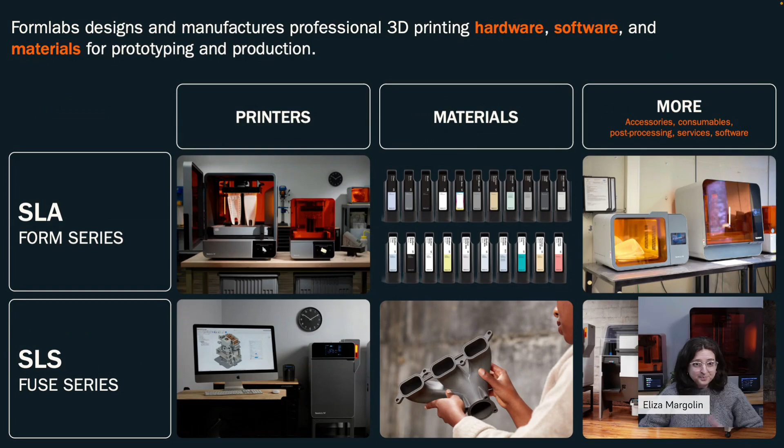Of this wide array, today we're focusing on SLA materials, so one quadrant, if you will, of Formlabs' overall business. Here's an overview at a glance of the SLA materials available. We split them into different families: the general purpose family, engineering family, dental and medical materials, materials for casting, investment casting of metal parts, and then Form X, which is more advanced workflows, and we'll look at some of those in a moment.

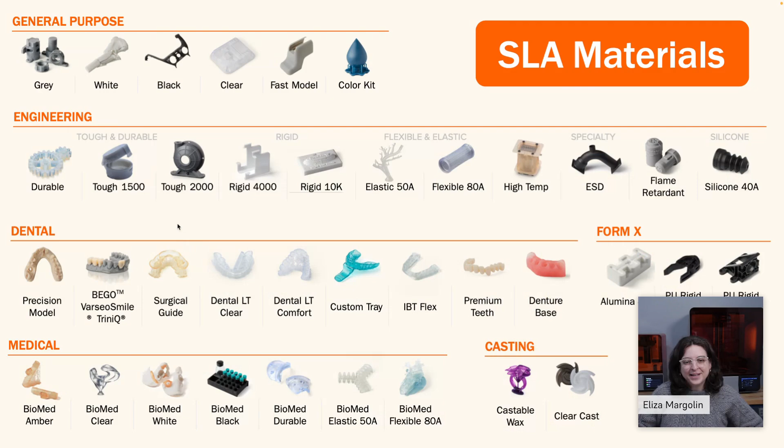The general purpose materials I mentioned are, I think, a lot of the time compared to PLA for those who are using FDM 3D printing, because it's the most accessible, most straightforward workflow. But the mechanical properties of the materials pictured here, the general purpose materials from Formlabs, are more comparable at this point to an entry-level engineering plastic like PETG.

So they are not general purpose as in insufficient for engineering purposes. They are general purpose as in they're versatile — they balance stiffness, toughness, strength, impact resistance, all of these different qualities — whereas some of the engineering materials are formulated to optimize for one or a few of these characteristics. So these are your general purpose daily drivers, if you will.

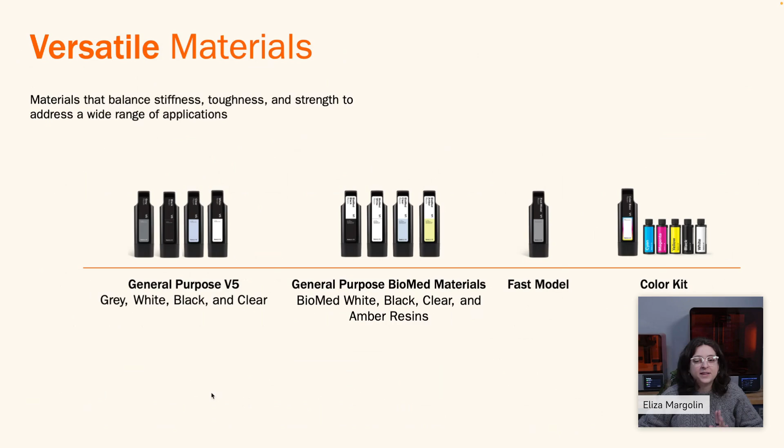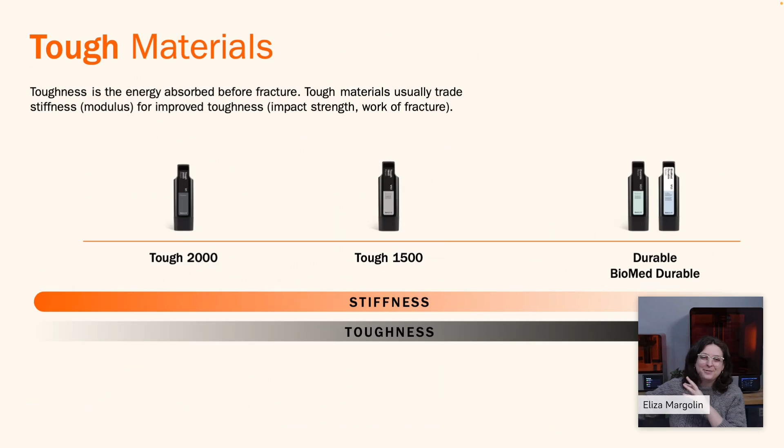Tough materials get requested a lot. Toughness is the amount of energy a part can absorb before it fractures, which is often a trade-off with stiffness. So we see higher stiffness on the left here with Tough 2000, where 2000 is the tensile modulus of the material in megapascals. On the other side, still within the tough family, we have higher toughness and lower stiffness, more ductility, on the right.

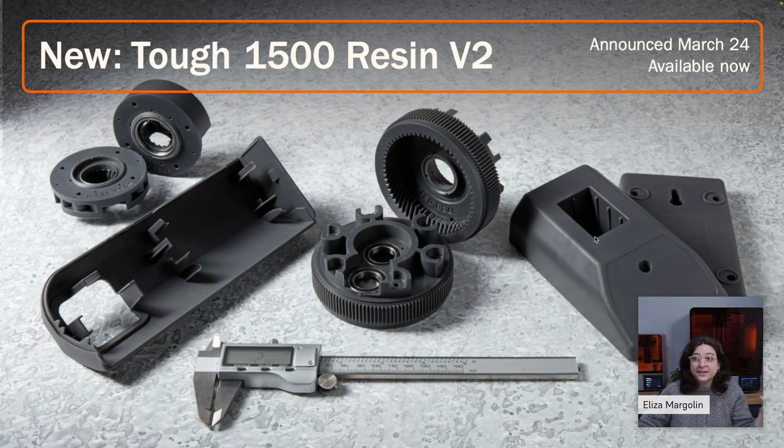If you'll indulge me, I can share a little bit about the latest material from Formlabs, Tough 1500 resin, which I have one of the parts pictured with me here. It is real — this was announced a couple weeks ago, and it's available now for pre-order. If you want to get your hands on one of the samples, we have this belt buckle, and you can request one for free on the website. We'll mail it to you, so you can get a physical sense of the properties I'll talk about for a quick second here.

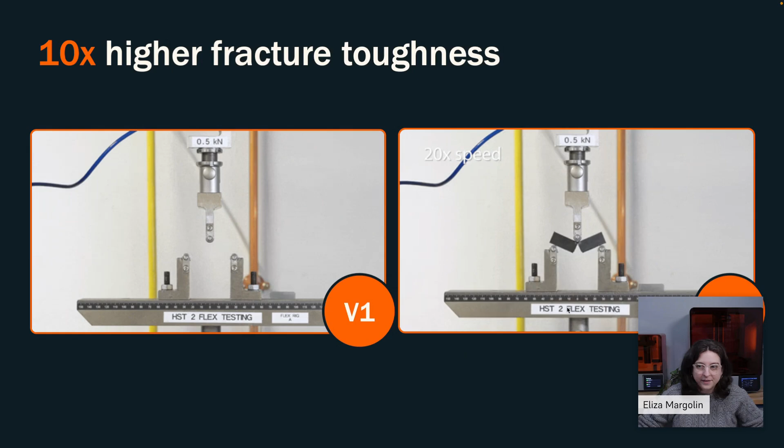If you've used Tough 1500 resin from Formlabs before, this is a different beast. Tough 1500 resin had pretty high notched izod as one of the tests, but pretty lower fracture toughness compared to this new material. So it takes 10 times more force applied to fracture the part. You can see the crack propagates much more slowly, with much more force applied.

With Tough 1500 version 1, it could absorb a decent amount of strength when the parts were thick, but thin parts were more brittle. The new formulation performs much better on toughness at thin geometries.

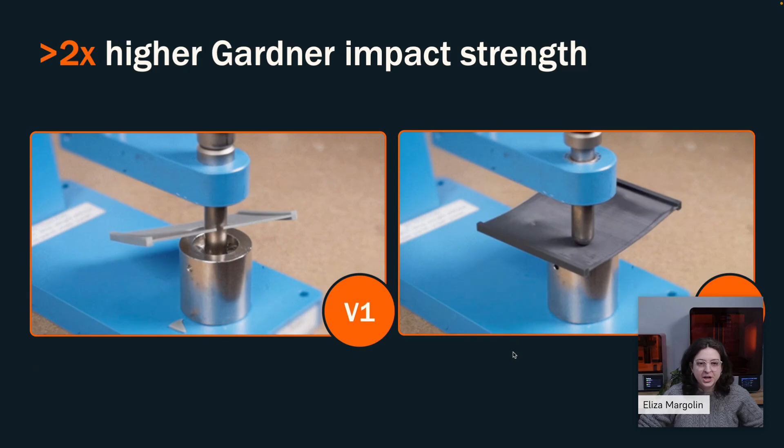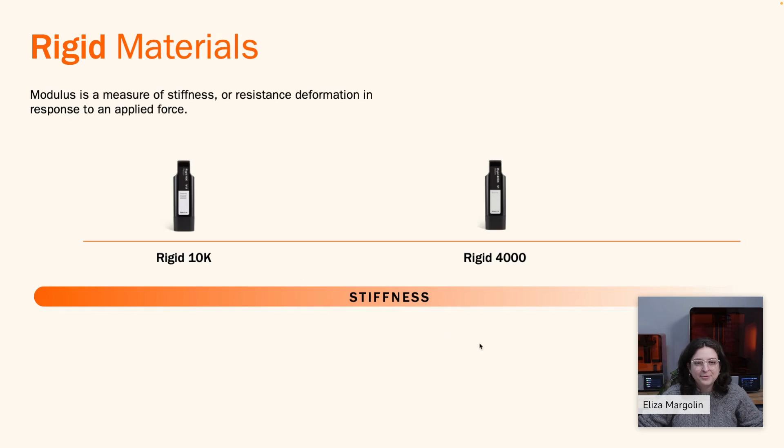If you think about the difference, like a rubber band would be a softer elastomer, and then like a pencil eraser would be a tougher, or like a shoe outsole would be a tougher, soft, flexible material, or a stiffer, flexible material, excuse me.

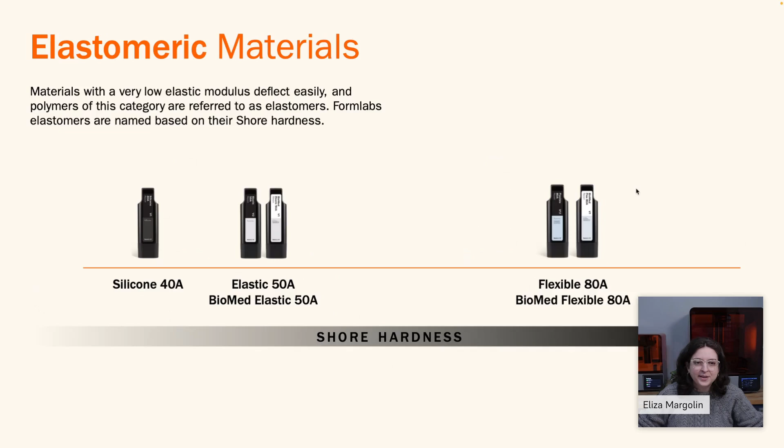We have additional materials that enable a particular application or material property. So high temp resin has the higher heat deflection temperature. Flame retardant resin, which you see in the GIF here, is self-extinguishing.

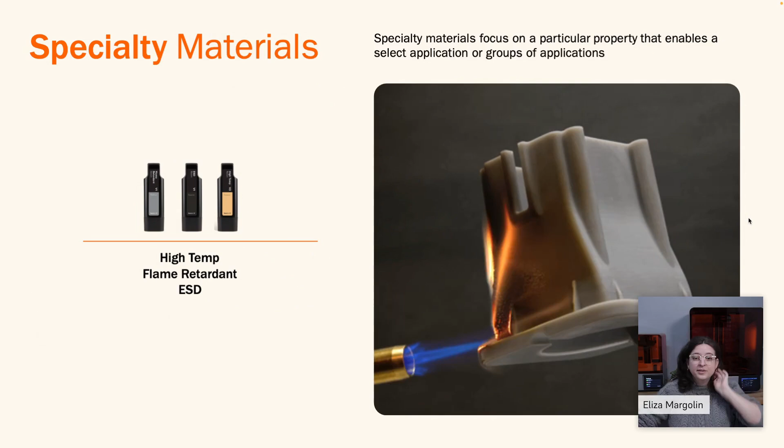This is UL94 Blue Card certified material. And then ESD, which is a static dissipative material for working with electronics and other sensitive devices that are sensitive to static electricity and static charge.

I briefly mentioned castable materials earlier. We have clear cast resin, which you can see here in the front. These are for printing large investment cast pieces for engineering parts. And then castable wax resin is more used in jewelry and dentistry for small parts.

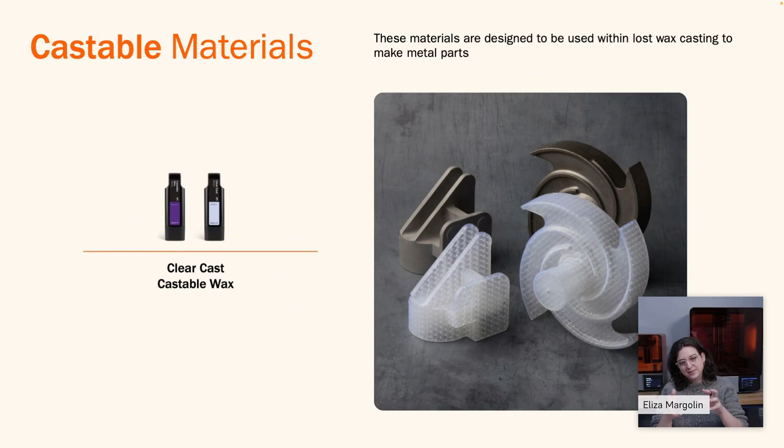These would take the place of wax in a lost wax casting process, where this is the master pattern, and then it gets put into plaster investment and burned out so that metal can be cast in its place.

We also have a range of dental materials, which are rather niche. If folks here have questions about dental materials, we can get into that. And I know some of the pre-submitted questions had to do with the biomed materials, which we can get into, biocompatibility, in the Q&A section as well.

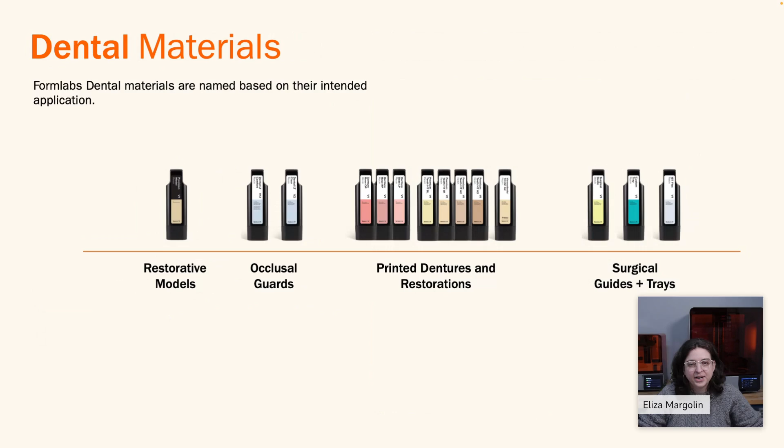Lastly, I mentioned Form X, which is the novel chemistries and multi-step workflows. Alumina 4N is a technical ceramic material, and the PU Rigid 650 and 1000 materials are hybrid chemistries.

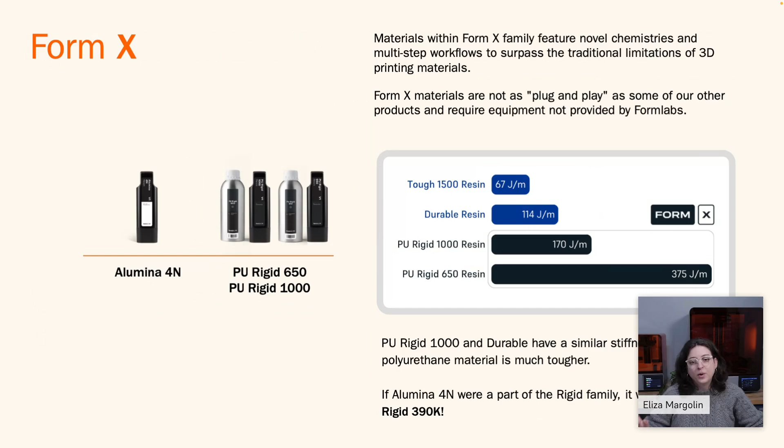So these are genuine polyurethane materials that really push the bounds of what we were talking about, toughness and stiffness earlier. And the polyurethane materials, which have, as mentioned, a more complex workflow, totally change the game in terms of what mechanical properties are attainable with SLA.

We also recently introduced the option to print with any 405 nanometer resin on Formlabs SLA products. So with open material mode, here are some examples of real Formlabs customers who formulated their own materials.

They have their own materials R&D, which our host Sharon obviously knows very much about. And it's been really cool to see what customers are using Formlabs products for, where they have access to the reliability and the build quality of Formlabs products, but their own either novel chemistries or certified workflows, that sort of thing.

One question that I think we're going to get a lot is, how do I find the right material for a fill-in-the-blank application? The general framework I would recommend to anybody is to first define your performance requirements. What does the part need? Does it need to be able to be dropped from chest height onto a concrete floor? Does it need to be able to flex 10,000 times? And then think through how you would translate that into material requirements.

If it has to be dropped from chest height onto a hard floor, that would be toughness, tensile modulus, or impact strength. And if it has to be flexed 10,000 times, that's flexural strength and flexural wear.

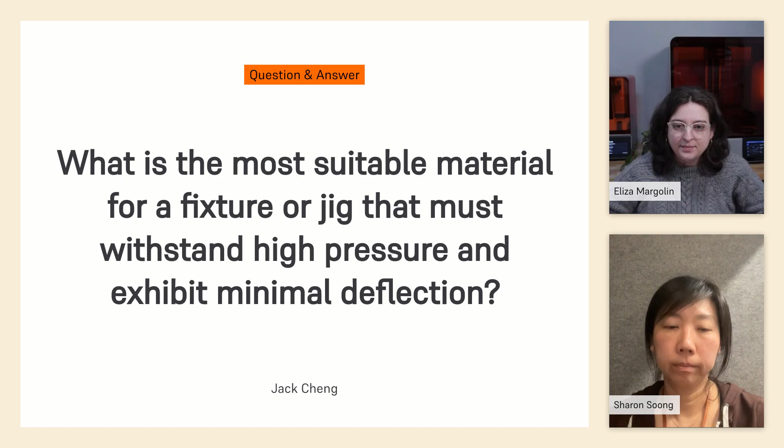Yeah, so right now I think it would be the new Tough 1500 V2. We've taken steps in formulations to improve the impact strength. And people talk about impact strength or talk about toughness. We've looked at the toughness through many different ways. Oftentimes, your IZOD is not the most representative, so we started looking at some of the other testing methods that have better correlation to toughness in various different applications, such as if you have to do tap and drill, or if you have thin parts that actually won't snap.

And so it also has improved UV resistance because of the formulation work that we've done. And color is a little harder today, but I think, just like all of our other resins, it can be spray painted or painted to different colors.

Yeah, and we also found to further improve UV resistance, there are some clear coats, spray-on UV clear coats that can also prolong the UV aging for all of our resins.

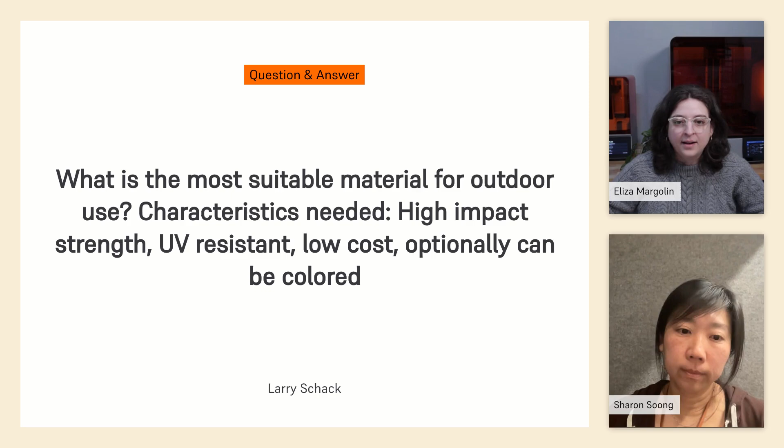On the other end of the temperature spectrum, what material would you recommend for low temperatures, minus 80 degrees Celsius freezer?

Oh, depends on if the material is going to take any impact or any deflection at that temperature. If it's just a part on its own, I think in general the parts will get more brittle as you lower the temperature. So again, it's depending on what the part will see during that temperature. This is where silicone will still work pretty well.

So, do you have any tips for how you would get more stability or less brittleness at this extreme of a temperature? At this temperature, I think pretty much all of our resins are going to be pretty stiff. This is something really depending on what you're looking for, this could be something to look into. I think you will have maybe a better shot with SLS materials.

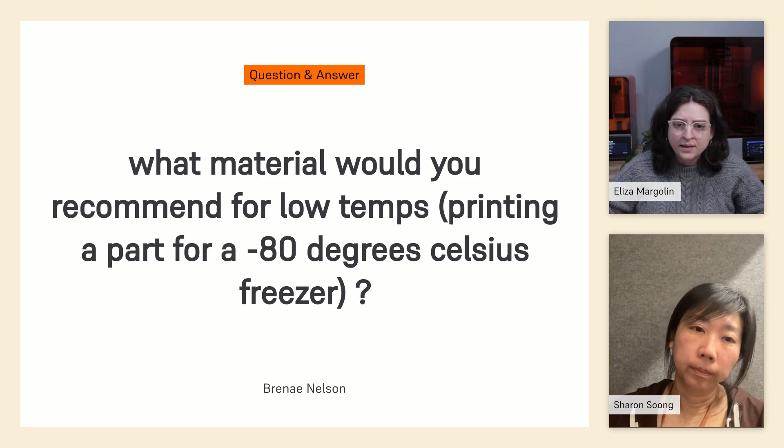Cool. Does Formlabs have a material suitable for both very high mechanical stresses and ESD protection?

Today, we only have one resin that is developed for ESD protection, which is our ESD resin. We don't have another material that can do both right now. I will say the ESD resin that we do have is more comparable in mechanical properties to the version 1 of Tough 1500 than it is to a GP resin. So to Hunter, who asked this question, take a look at the ESD resin technical data sheet, which is available on the Formlabs website. And yeah, feel free to reach out to our team with follow-up questions too.

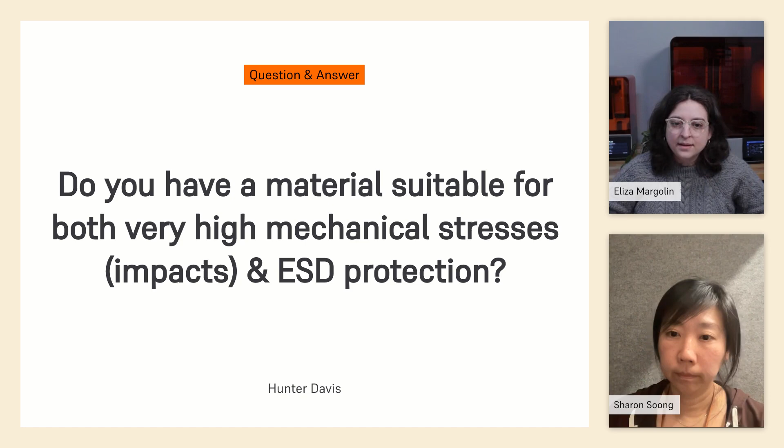A couple questions about Rigid 4000 and Rigid 10K. Can you talk a little bit about homogeneity of the glass-filled particles in these materials?

Yeah, so these glass particles are pretty small, and in the formulation process, we definitely spend quite a bit of time making sure that there's no agglomeration that will happen. When you're printing with these materials for close to a month, you will start seeing some particles settle in the tank, but we ensure with the wipers that are part of our printer that you will pretty easily resuspend them. So there's a lot of work that has gone into making sure that the fillers suspend uniformly in our resin. And obviously, if you have a cartridge that's been sitting there for a long time, you need to shake it up. But in normal use, if you're following the instructions, the homogeneity is very good with these two resins.

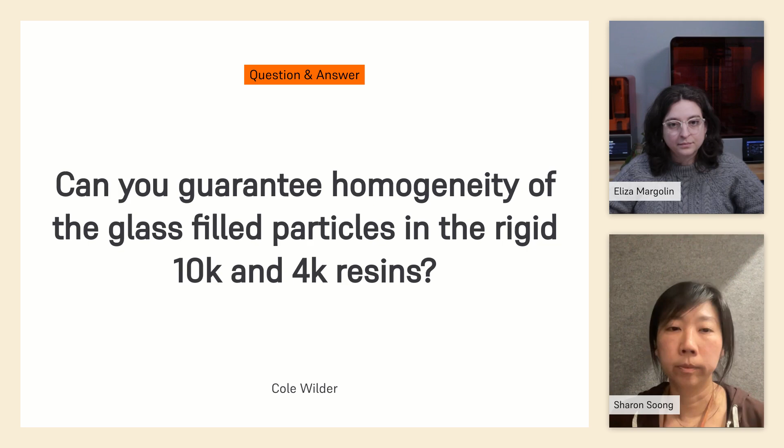Somebody's wondering about the heat resistance specifically, and they are looking for something similar to PEEK.

Yep. So our photopolymer matrix in general, when it goes around 200 degrees Celsius, you will start to degrade them. Basically, they will burn, and so it's not going to reach what PEEK can typically do, which is well over 250 C roughly for continuous use. And so you will see our parts turning brown, turning more brittle, starting to burn at those temperatures. But if you're looking at sub 200, like 100, 150, these materials will work pretty well, especially Rigid 10K.

And they'll also behave differently depending on whether it's ambient heat or directly applied heat as well, right? Meaning like if it's being burnt or? Yeah, I'm thinking about a part operating in an oven that's at 400 C versus being proximate to a point source of heat that's at 400 C. Sure, that's for sure.

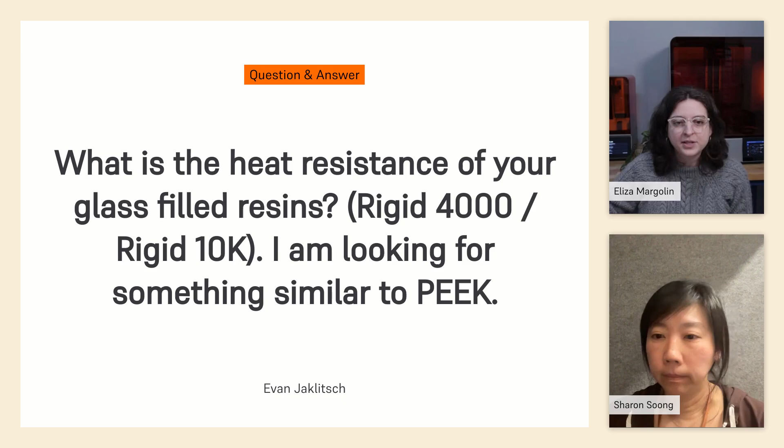Yep. And then duration matters as well. A lot of injection molding is pretty high temperature, pretty high pressure, but it's for a short period of time. Yeah, great point. Great point. Especially if there's cooling channels or something incorporated.

One more question about Rigid 10K. What can be done to reduce the risk of cracking, part thickness, geometry, stuff like that? Yeah, so I don't know what very high heat means here. But if the cracking is because of thermal expansion, meaning the temperature rises too fast and certain parts are already expanding, through the thickness it could crack. We don't see a lot of Rigid 10K cracking internally. So I don't know if I have a great answer here to help.

But in general, we've seen if you have thicker parts and your heating is less even, you could crack due to thermal expansion at local spots. I would say other part design considerations that apply to plastic parts in general would apply here as well. Like put fillets in corners, draft angles. Sure. Reduce those concentrations of stress within the part.

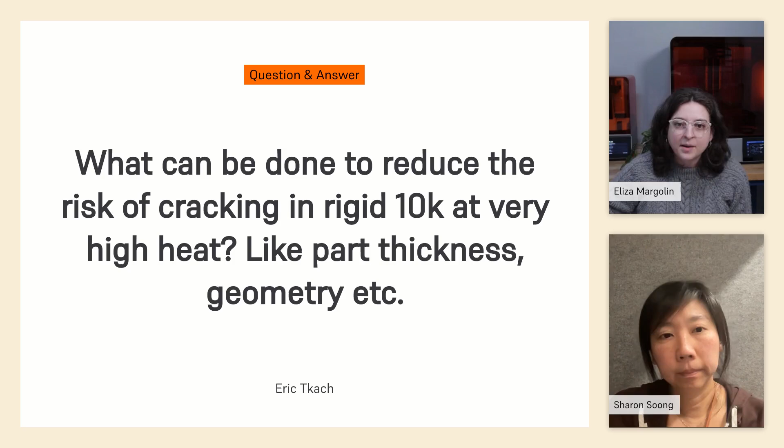Okay, a couple questions about post-processing. Do you have recommendations to get crystal clear polishing with Clear Resin V5? Crystal clear polishing. I don't have a specific recommendation. We definitely do polishing here internally, but we probably use our dental polishing setup that actually works pretty well. Maybe, Liza, we can follow up with what Henry did to mimic those glasses. Yeah, great. I actually know a little bit about this as well.

So as Sharon mentioned, we have a dental lab inside of our office because we work with so many customers in the dental industry, and they have basically a polishing wheel with particular polishing compounds used in a lab environment. I'm not sure exactly what they are, but a buffing wheel and a polishing compound works pretty well. You can also clear coat or dip the part; you can actually use liquid Formlabs resin to dip it in. You can also use UV blocking clear coats, which will prevent yellowing of the part over time.

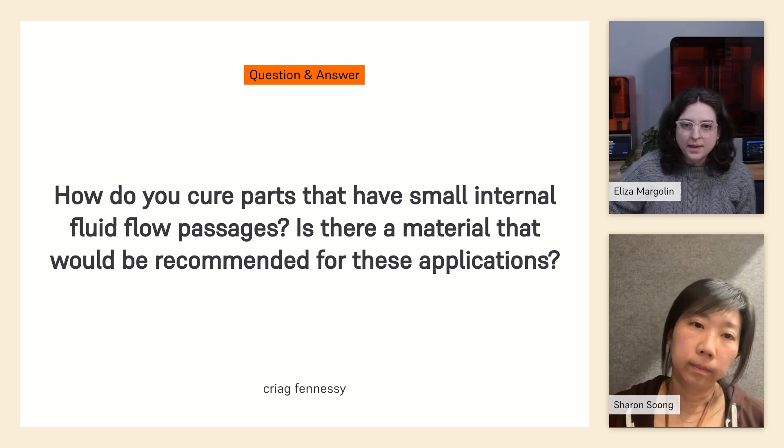One person is asking if we have specific primers to recommend for specific resins. Not to my knowledge. Do you have any components to look for or look out for in a primer? No, I don't think I have anything specific. I don't know if we have something on our websites that talks about specific application. I think there is. If you go to support.formlabs.com, there should be a tutorial article with information about priming and painting parts.

A couple questions about biocompatibility. This question is specifically, is biocompatibility affected if the part is not post-cured? And maybe more generally, would you like to talk about biocompatibility of materials and workflows among SLA materials?

Yeah, so biocompatibility definitely can be affected if the part is not post-cured. For all of our biocompatible resins, whether dental resins or BioMed resins, we've gone through all the testing with a specific workflow to guarantee the safety of the parts after they've been post-processed. We talk very specifically about how long you should wash and how clean the IPA should be. Sometimes it's a two-stage washing process, and then post-cure with specific temperature and duration.

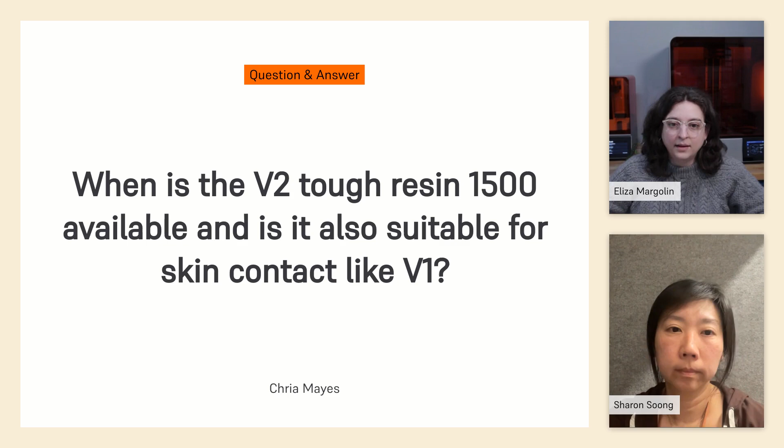Follow-up question on Silicone 40A. What kind of cure? None of these. Trade secret? Yeah. Oh, it's on the patent, so. Okay. Yeah, it's still photo cure. There's a photoinitiator in it. We were able to find a way to get the cross-link reaction to happen fast enough in the printer.

Photocurable silicones do exist, but they typically take a long time and a lot of light, which makes it really hard to make them work in our printer. But we were able to find a chemistry pathway that allows it to work in our printer. We had to take some regressions, but for the most part, it's a true silicone. It performs very much like true silicone, and you can print it in any shape that you want now. So yeah, it's none of these. And check out the patent.

Can you talk about the process we use to measure accelerated aging? The answer to your question is yes, there's an ASTM test for this. But Sharon, I'm sure, can share more information. Yeah, so I think with Tough 1500 V2, we spent a lot more effort addressing the general complaint with photopolymer resin, which doesn't last because of UV degradation. And so on the Tough 1500 V2 TDS, you now will find UV aging test results as well.

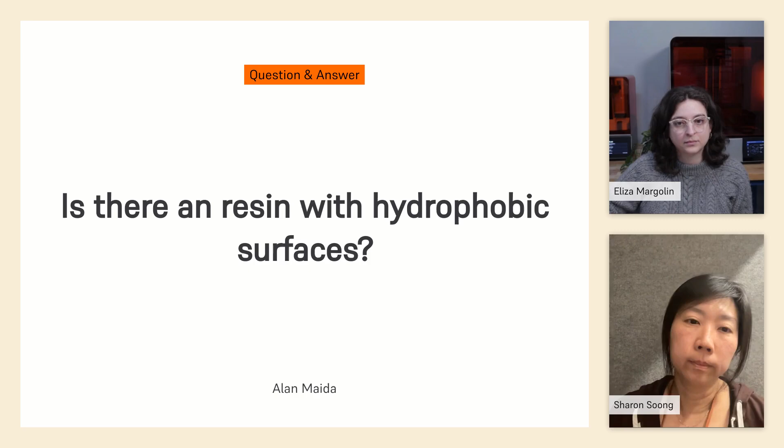There's another question about water contact. Someone has tested various resins that go soft after a few days in water. Are there any that you would recommend? And would it be the same answer as the previous question? Completely soft. Yeah, so I don't know what resin's been tested here. There are a lot of lower cost resins out there using monomers that are very, very hydrophilic. In our resins, I have a hard time seeing Rigid 10K being really soft after a few days or 2 months of water. But again, it depends on the temperature of the water as well.

I think the TDS solvent compatibility will give some insights into which resin might do better. And also, what does keeping physical properties mean? Are we looking for a certain stiffness? What specifically is the application? We don't really formulate specifically for submerging in water as an application in our resins today. An interesting one to look at could be the dental resins, because we spend a little more effort since it's in your mouth. Like our denture teeth, we make sure water soaking doesn't make it softer. So that's one place we do formulate for a 37C constant water environment.

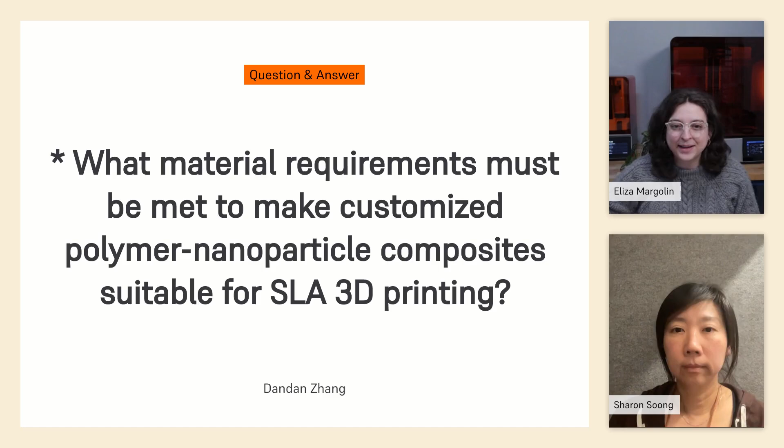Is there a Formlabs material you would recommend for creating cushioning and durable footwear, like a midsole, with Formlabs SLA printers? Yeah, so for a midsole, not a cleat, it is the Rebound resin. It was developed specifically for that application. Rebound passes all the testing as a footwear midsole.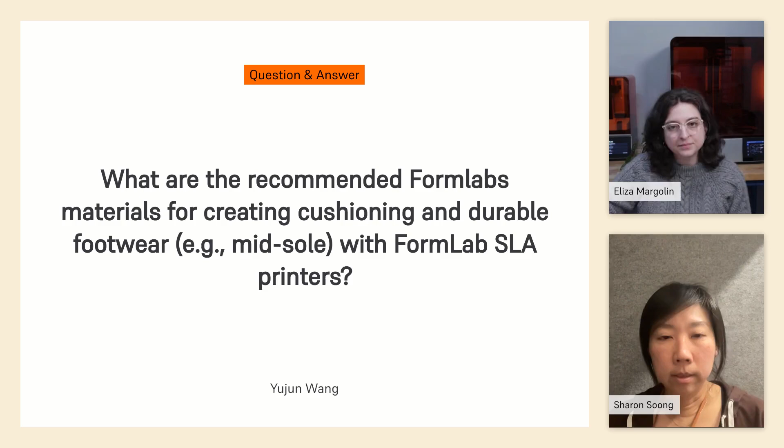Can engineering materials be nickel plated, or can you talk about electroplating of SLA materials in general? Yeah, I think that has been done by other customers. I think all of our resins in general, unless you go to some of the highly filled resins, are all going to be plated pretty equivalently. And so I think there have been customers pretty successful in electroplating our resins. Yeah, I think we've actually had Rigid 10K be plated successfully as well.

I highly recommend a company called Repliform in, I want to say Delaware or somewhere in the US mid-Atlantic. Sean at Repliform has done a ton of research on electroplating SLA printed parts. He's a longtime collaborator of ours. He is a wealth of knowledge. Yeah, highly recommend checking out some of his work.

Has Formlabs identified resins that will react to acetone vapor for getting a seal or sheen on the outside of the part? I'm gathering this person has maybe worked with vapor smoothing of SLA or SLS or FDM parts before. Unlike thermoplastics, the resins are cross-linked, so they don't really melt. They typically break down and/or swell. And so I have a hard time imagining it seal, because that's more like a melting behavior than our parts.

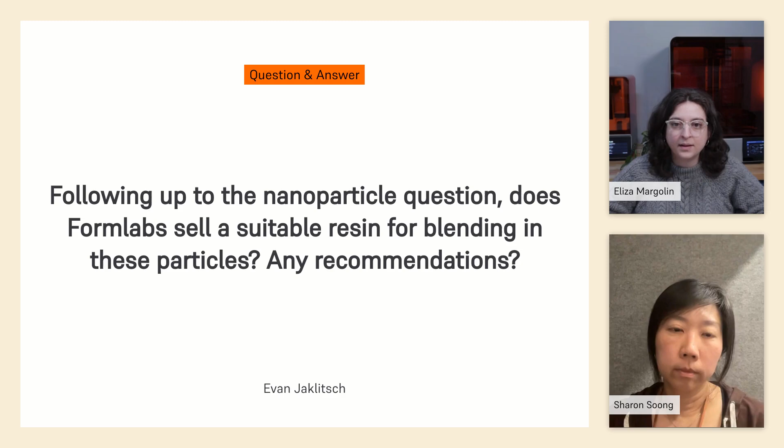Is there a defined limit on how viscous resins can be for printing with open material mode? We don't set a limit, but if you look at the printing process, there are multiple things that could stop you from being successful, and there are also ways to mitigate that. If you have a very viscous resin, in your first motor move, where your build platform is coming down, you have to squeeze out the liquid. Then you run into whatever the mechanical limit is in deflection and all that. With viscous resin, you have to wait much longer for the fluid to stabilize. Otherwise, you will have fluid flow happening while you're applying the light, which gives you pretty messy results.

So there are ways to mitigate the squish move, such as higher layer height. You're going to have much better pressure if you're doing 200 micron or 150 micron layer height versus a 25 micron layer height. And then obviously your resin has to be tailored so that the light can actually go through whichever layer height you choose. If you can get away without wiping, that will also help you with printing viscous resins.

Our wiper is pretty robust and can probably move through viscous resin as well. However, the wiping motion with viscous resin often causes trapped bubbles, which could end up in your parts. So you could consider taking that away. We don't have a defined limit. Internally, I think the most viscous resin we ship on Form 4 today is probably around 9,000 centipoise, which is silicone, but that is not the limit of the machine.

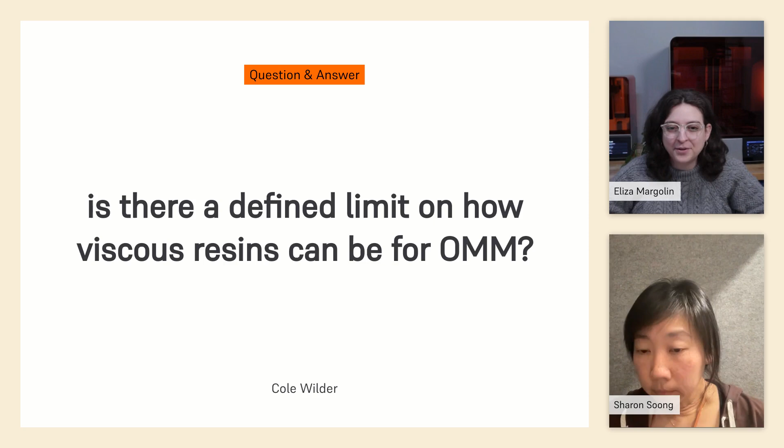Okay, we've got a little under 5 minutes left. I appreciate the tone of this question. What is the most toxic resin in the Formlabs portfolio, and what type of PPE would you recommend for it?

We can. So every resin has its own SDS. Please read it and make sure the PPE is being used appropriately. We in general do not design our resins to require respirators or something that is really bad from a skin corrosion perspective. There are some specialty resins that carry a slightly higher warning on skin corrosion, which means you should cover up yourselves and not be in contact with the resin, and that's specifically for a very specific purpose.

But typically internally, safety glasses and gloves is what we do for all of our resins. We still think it's always a good practice to run your printers and do your post-processing in a well-ventilated space, if anything, just because IPA in high concentration can cause people to have headaches and things like that.

But from a resin design perspective, we actually pay a lot of attention to make sure we don't use toxic ingredients. We also pick raw materials with higher purity. Some of the lower cost chemicals have a higher percentage of small molecules like MMA, which is actually pretty bad if you're exposed to it for a long period of time. So our SDS will tell you everything you need to know about a specific resin. There's no one super toxic resin that comes to my mind right now.